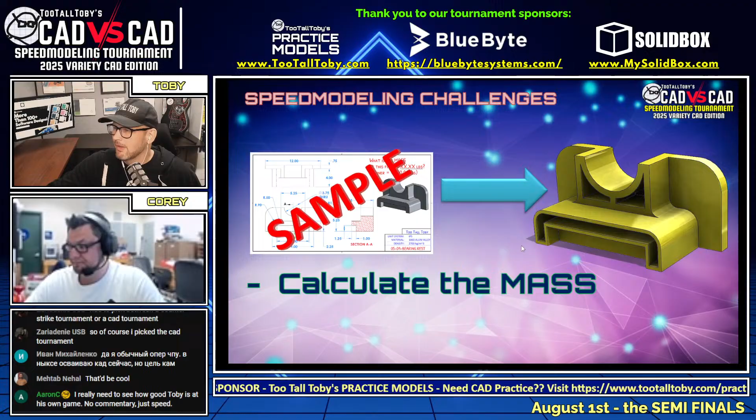Here's how these tournaments work. Imagine we have a match between Ivan the Reasonable and Aaron C. We're going to show them, and all of you, a 2D drawing, and we're going to challenge you to turn that 2D drawing into a 3D model. We're really challenging our runners to do this, but if you're watching, you can absolutely play along. Our runners will be challenged to calculate the mass, and then enter that mass directly into the YouTube chat.

Now, the tournament has some special rules. First of all, it's a best-of-3 matchup, so really a first to 2 points. You'll see our tournament runners in the upper corners have a little indicator of how many wins they have, and once one of our runners gets to 2 wins, they'll advance to the finals of this tournament.

To get a win, you have to earn the point. Let's say you answer and you answer incorrectly. Well, Corey and I are going to tell you, I'm sorry, that's incorrect, please try again, and then you have one chance to answer correctly again. If you get it wrong a second time, you can't earn the point for this battle. That doesn't mean the other person automatically gets the point, though - they still have to earn the point. The first person to earn 2 of those points is going to advance on to the finals.

Now, everybody who's watching can absolutely play along. Get your CAD system ready, get your screen capture tool ready, and when I show the 2D drawing, you can take a screen capture and try to model it and see if you get the answer correct first. If you do, there's a little thing we do in the chat - you could say 'I got it.' Or like Mesa Makes did, if you've got the membership to the channel, you get these special icons you can spam to let everybody know.

But what I don't want you to do is post the mass in the chat, and I don't want you to help our runners if they get stuck. Today, these guys are the stars, so we're going to let them shine. If you're watching and you realize somebody forgot to fillet or should do that as a shell, that's fine that you think that, but just don't type it in the chat. We want to make sure each runner has a fair opportunity to come to the correct answer.

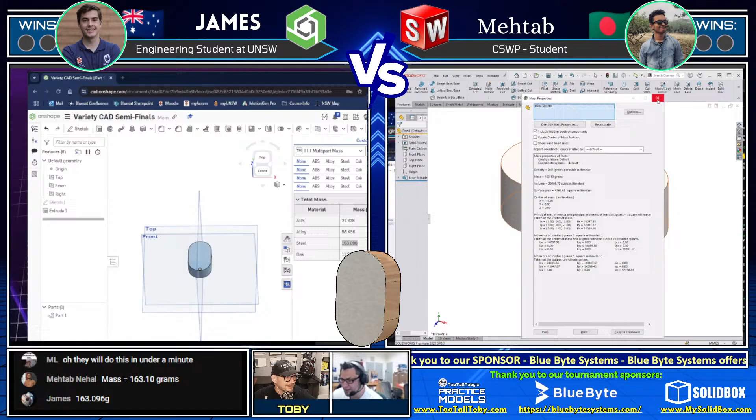Yeah, he's taking a page from Fancy's book, doing it with the trackpad. I'm going to do it, but I'm going to do it even harder. Trackpad on a Chromebook, he's just going for it.

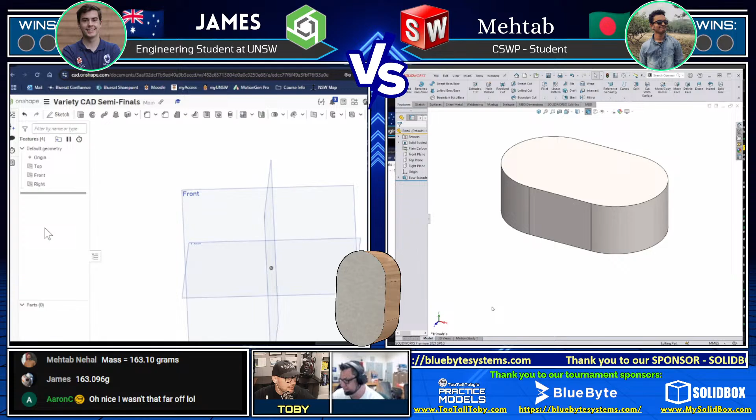I like it. We see here that James on the left is looking good, everything looks good on his screen as well. So I think we are pretty good, this is our tech check. This is where we make sure that everything is looking good and working before we actually get into the battles. We don't want to find out afterwards that we're missing half the screen or can't see the feature tree, something like that. So I think these look pretty good.

Corey, oh wait, we're missing something here, we don't have Corey's name. Oh, so stand up a little bit there.

I see Aaron C coming through with an answer too. I think he's using the calculator again because he was a little bit off. I like it when he might need to charge the batteries on the calculator. Yeah, maybe a slide rule and he slipped a little bit, I don't know what he was using today.

All right, we gotta add in Corey's name here. Hold on. Where's Corey's name?

Oh yeah, I was surprised for a second, I thought this was the real model. It says ML, it seemed too simple.

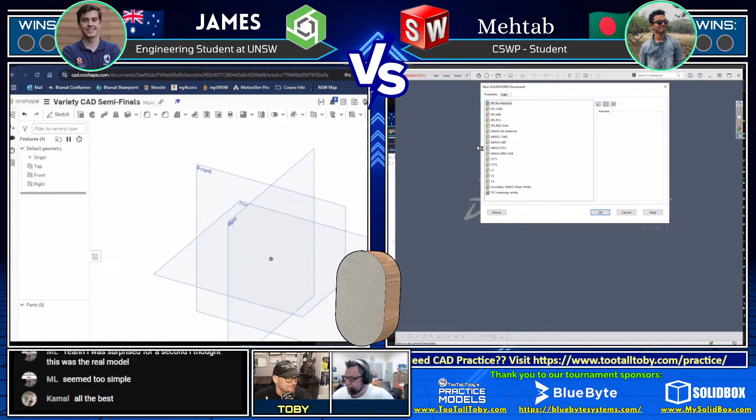Yeah, we always do a tech check to make sure. I know when we ran the high school tournament there were definitely some issues with units and material libraries, and this tech check definitely saved some kids from completely messing up their models later on when it actually mattered and counted. So we got to make sure we got everything right before we actually get going here. I think it was a couple years ago, who was it, was it Dom? His whole computer reset during the tech check or something, man, SolidWorks crashed. Yeah, we've definitely seen some issues.

All right, did both of our runners come in with an answer? Aaron C came in with an answer, good job Aaron C, let's see here. James came in with an answer, and Mehtab came in with an answer.

Okay, excellent. So it looks like everything is working correctly for the tech check. So that means the next place that we get to go is the Wheel of Fate.

So if you're here for the first time, what you should know is that the Wheel of Fate helps us determine which models are going to go to which runners by randomizing. It's proprietary technology only found here at Too Tall Toby's CAD vs. CAD Championship. So we're going to mix this up a little bit, shuffle up these names a little bit.

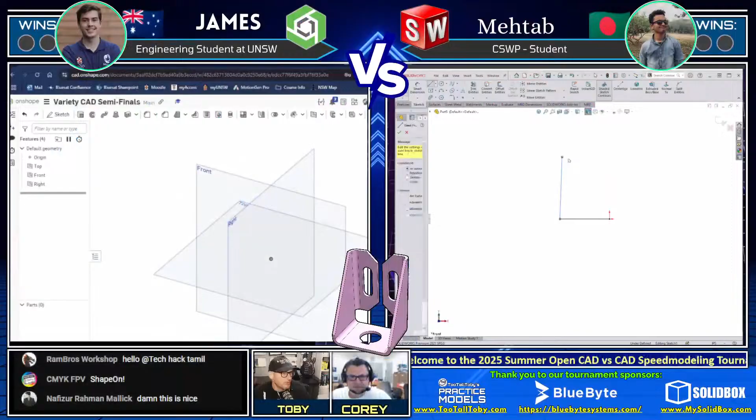Both of our runners have grabbed a screen capture of this challenge, and so we move into the CAD vs. CAD arena. We've got James on the left using Onshape. We've got Mehtab on the right using SolidWorks. And it looks like Mehtab has already jumped in here, modeling this thing, drawing up. First blood. Yeah, man, drawing first blood, extruding this out.

Looks like maybe James didn't get a chance to grab the screen capture. It looks like maybe he was struggling. I'm going to just flip back to the screen capture here and make sure that he can see it. I apologize that we're going to miss the action a little bit here, but I just want to make sure that James does, in fact, have a chance to grab the screen capture. There we go. He's moving through the model now. Here we go, that's what we needed. So you see Mehtab on the right was able to extrude that out, take first blood.

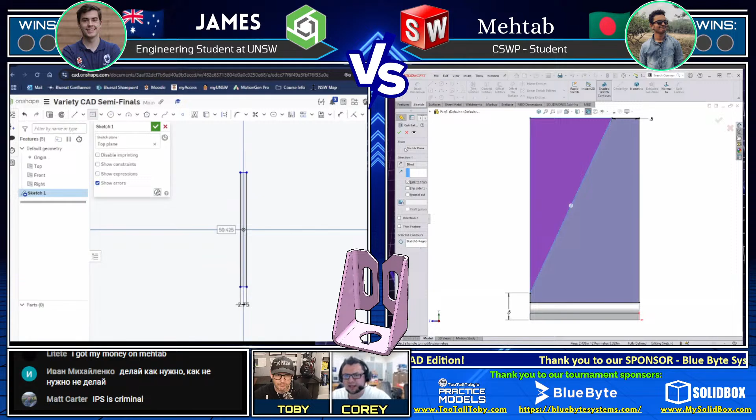Interesting approach here. He decided to just extrude that as an L shape with the sheet metal tools. I think that's probably a pretty solid approach. Yeah, no, for sure, it's an easier way to cut that like he's doing right here, you'll see. So yeah, I guess he's just deciding to do half of the model to begin with, and maybe he's going to use some kind of a mirror or something on the tail end.

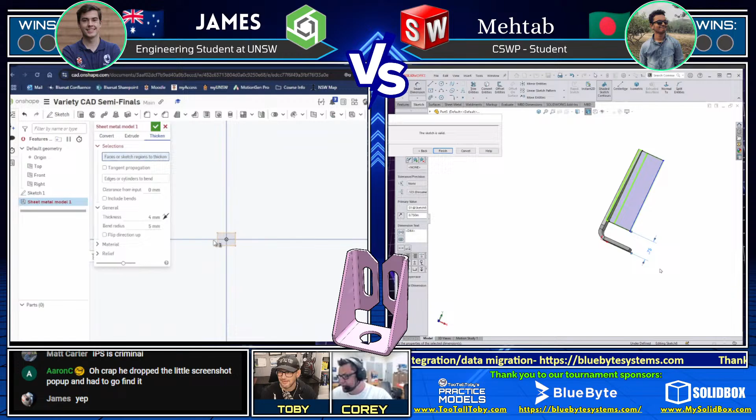What do you think about that approach? I think, I mean, I like seeing the whole thing laid out as that flat pattern, but however you get there, whatever works for you. I think when you're working solo in your own environment, you don't have to share, that's one thing you can kind of do however you want. But when you're in a collaboration, it's kind of whatever the team flow is. Yeah, exactly, you got to. That's a great point. It's not just about how you're modeling it yourself, it's really about how the whole team is modeling.

Cobain in the chat says, sheesh, Mehtab is super fast. Yeah, look at him, he's already gotten into his third feature here. He was able to extrude that L shape, he was able to cut that L shape kind of down from the top. And now he's getting in here and he's modeling up this little flange sticking out the back. And this model, I'd say, is a tier 4 model. It's a sheet metal model, which sometimes people struggle with. Not everybody has the most sheet metal experience, but it looks like Mehtab is having no problems with this sheet metal model. Getting in there, made those as fillets, realized those were supposed to be chamfers, no problem, just jumped in and edited them to get them to be chamfers.

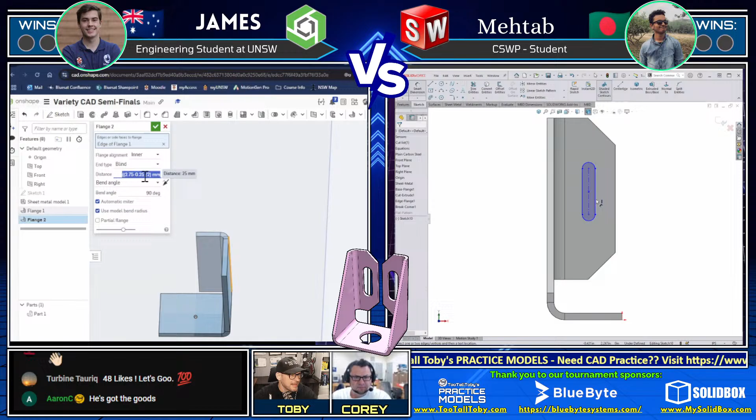Now we see Mehtab is going to go through and add in this slot here, this kind of slot shape running down from the top of the model, getting in there, applying the appropriate dimensions to locate it. It looks like James is getting those flanges thrown in. That mold line, inner, outer, those kind of always mess with my measurements sometimes too. Yeah, that's a great point, it's definitely something that I've learned a lot about. I kind of come from a sheet metal background, so learning where the flange is derived from.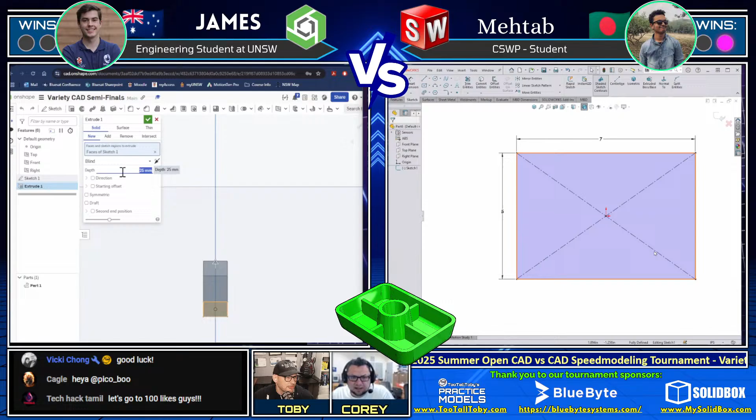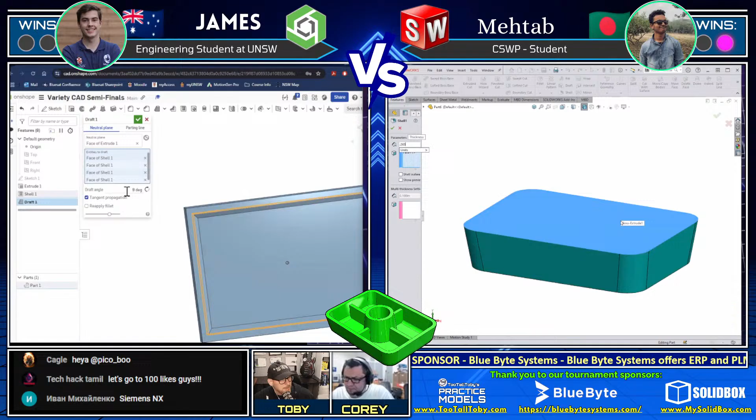Let's take a look at how our runners are modeling this. They both grabbed a screen capture and are going through. It looks like they're both starting in a similar location, looking down on this thing from the top plane and turning it into a boss extrusion. Mehtab, as he's creating the geometry, is actually adding the draft during the extrusion. James on the other hand decided to maybe create it as a solid and then he's shelling it out. I don't know if he added the draft... oh yeah, he did, I can see it tapered there on James's screen. So they both added the draft as they were creating that extrusion. I like that.

And they're both now attempting to get this thing into place. James going through adding some fillets there. Mehtab looks like he decided to add those fillets and then hollow the thing out.

I think that was a pretty solid approach there from Mehtab, getting those fillets on there and then hollowing that thing out. And now we get into the second phase of this design, the inner shapes. You've got that circular boss sticking up through the middle, which has draft. You've got the ribs sticking up through the middle.

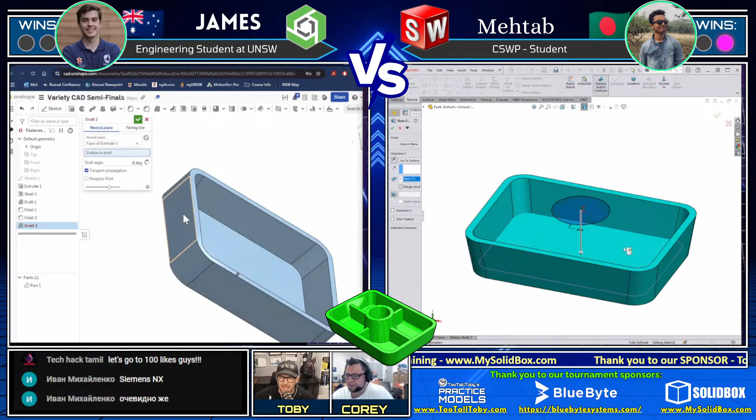And of course, when you're injection molding something, the draft will often go in two different directions along the same face, one for the inner face and one for the outer face, so that it can be ejected from an A-side, B-side cavity. So this is pretty interesting, this part here. It's not like you can just make a ring and then extrude it with the draft. You almost have to do it in two features.

Yeah, James is adding that draft now, and it looks like, when he was running with that fillet, it's definitely an order of operations thing I've run into before doing some of your practice models. If you add that shell after you've added the fillet, it'll automatically fillet that inside, which is a really cool workflow, especially if you're in these CAD competitions.

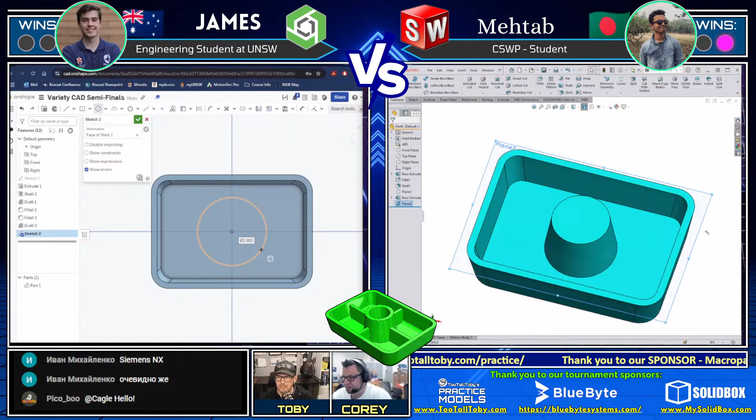Yeah, for sure. I think the challenge here is going to be the notation on the print. You may notice that there's a notation saying those fillets are not conical, that they are true radius fillets. So again, it comes down to order of operations. And sometimes, depending on the machinist, they'll prefer one versus the other. If they've got a tapered end mill that they can just rip around that corner on, they're going to want it to be conical, because that's going to make it easier for them to machine. But if they're doing multi-axis milling and they prefer for that to be constant radius, or maybe functionally it needs to be, you might receive a different note like what we see on this print.

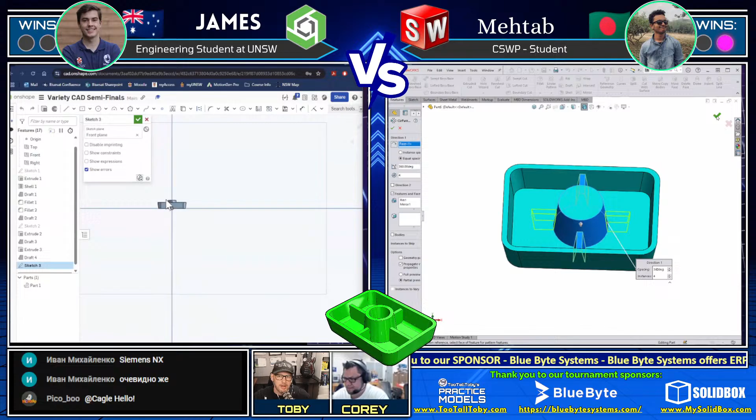Well, and then how many times you're gonna have to change a tool too? That's what makes a lot of people not like certain models or certain parts. So yeah, exactly. I think the lesson here is that if you're entering the world of manufacturing, you'll save yourself and your team a lot of money if you develop a good relationship with your machinists, a good relationship with your manufacturing team, and have these conversations to figure out what is considered standard. But here we can see Mehtab going through and trying to use the rib command.

Looks like maybe he ran into a little bit of a problem there. The first one went through no problem, but now, wow, look at that. He did a circular pattern and the rib extended on the circular pattern. Holy smokes, guys, that was a pro-level move. Wow, Mehtab, shout out to Mehtab, he really did nice there. That was cool, he did a circular pattern of the rib, and the pattern instance actually extended.

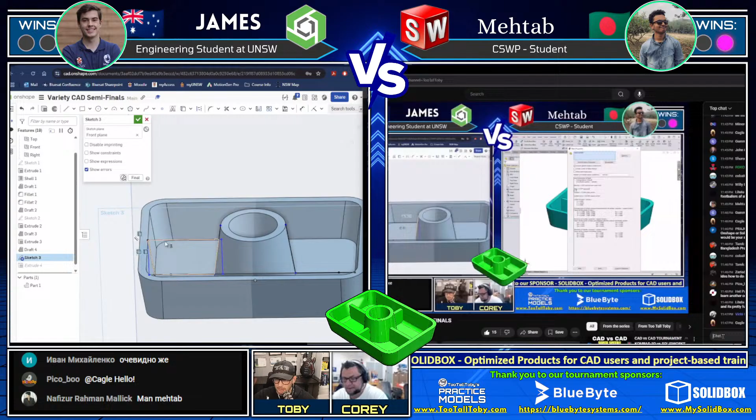Wow, and so Mehtab is looking over the model, and it looks like he may be coming in with an answer here. We're going to keep an eye on the chat and see what his answer is. And Mehtab coming into the chat with an answer, 0.777 pounds. And that is not correct. Unfortunately, Mehtab, that is not correct. He got the answer first, but it is not correct. So he's going to have to keep going through and trying to figure out what's missing. He's going to look at his drawing, he's going to look at his model, but that is not correct.

Shout out to Pico Boo in the chat, what is up my friend? And Vice, you want to remember that we're not going to be helping these guys out, okay? We want to try to keep this as friendly as possible. We want to let these guys figure it out. So let's make sure that we don't share any tips or tricks or anything. It's up to these runners to figure out what's going on in this competition.

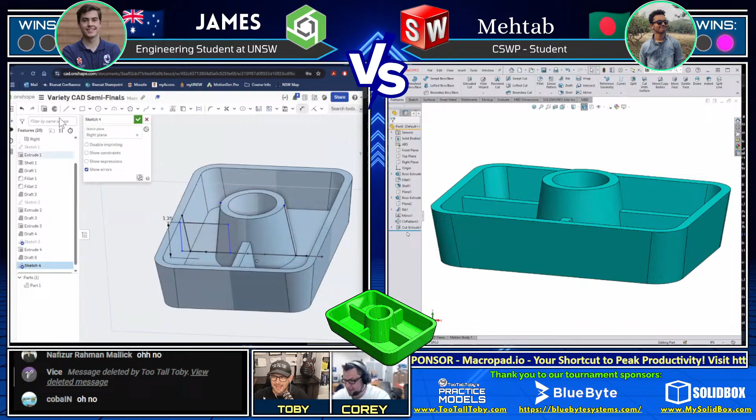Absolutely, and look at James using intersection. I just made a video on intersection the other day, and he's just right away embracing it. Yeah, intersection's a fun one, and you've got to have the right part to make it work. But once it works, you're like, oh my God, why haven't I used this for everything?

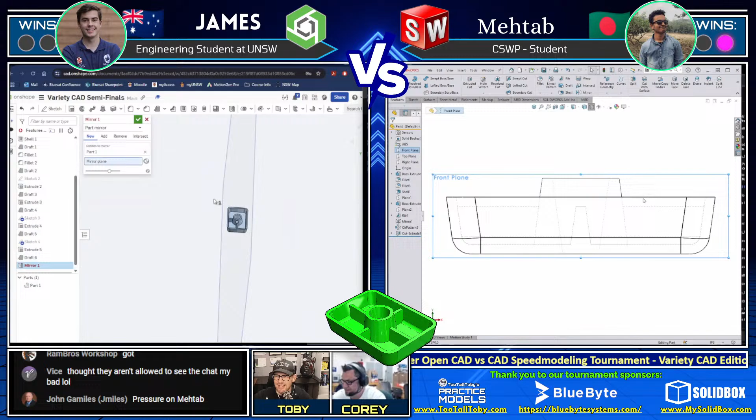All right guys, we're keeping an eye on Mehtab. It looks like what Mehtab's strategy here is he's really kind of checking and double checking and making sure that he's not missing anything. He doesn't want to overlook anything obvious that might end up costing him.

And James coming into the chat, 0.781 pounds. That is not correct, that is not correct. So both of our runners have answered one time, so both of our runners get to go through and try to answer again.

And Mehtab coming into the chat, 0.754 pounds. And Corey, we got ourselves a finalist. That is correct, 0.754 pounds, plus or minus 0.002 pounds.

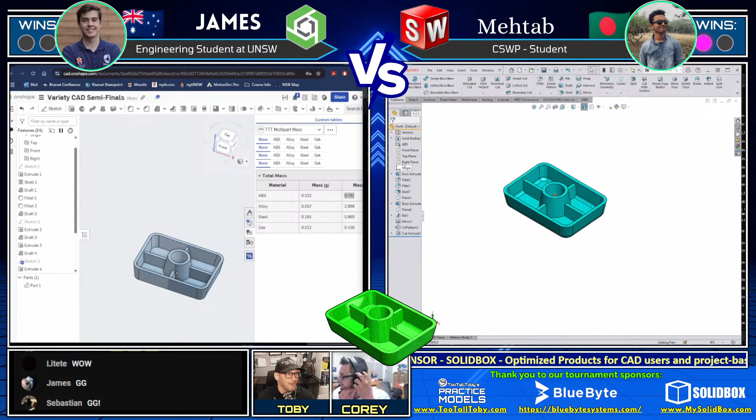Wow, wow, wow, GG to Mehtab. Congratulations, super fast once again on both of those models. A little bit more complicated than the models from last week, but wow, wow, wow. Good game to Mehtab, good game to both of our runners in that battle. But my goodness, Mehtab absolutely crushing, ran into a couple of hiccups there, went back through, figured out what the problem was.

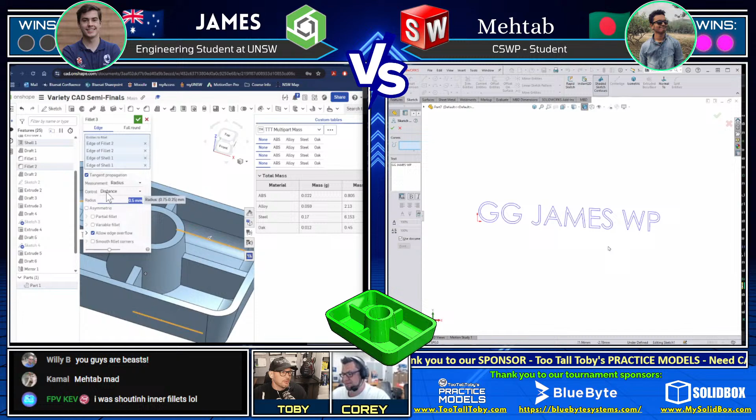It looked like in that one he was missing that fillet on the bottom of the model. He just needed to go through and add in that fillet, and he was able to figure out how to do it without blowing up the tree. And true professional grade work there. Wow, wow, wow, absolutely, congratulations. Well done, my friend. Guys, let's give a GG to the winner in the chat.

Let's give a GG really to both of our runners. Congratulations to James, his very first tournament, and he's made it into either third or fourth. We are going to ask our third and fourth place finishers to come back next week and do one sudden death battle to determine who is in third, who is in fourth, kind of warm us up before the finals. So we will see James again next week. But congratulations, your very first CAD vs CAD tournament, made it to the semifinals.

Well done, my friend. Yeah, well, and you did better than me, so we made it look good for Onshape, and you at least had a chance going. I felt like I was left in the dust of Gray's work last week. So yeah, good job, exactly, James. And going up against the number one seed, man. And for sure, finishing those models is super impressive.

We can see, I'm just going to click back to the CAD vs CAD screen for a second. You can see here that James was able to get that model to the end, get it to completion. And so just finishing those models in that limited amount of time is super impressive from anybody.

So GG. And I think the other thing to look at too is I always look at feature trees, and I see students make stuff, and if they're having a lot of unnecessary things - like his was fairly straightforward and pro level. So there's a couple of ways he could have cleaned things up, but I mean, I'd hire that guy tomorrow. Like that's great, and that's what we're here for, right? It's all about educating the workforce and going from there. So I think he's doing a great job, and I'm going to reach out to him. I want to see him talk to the kids because I think he knows the stuff, and it can show what can be done with Onshape, right?

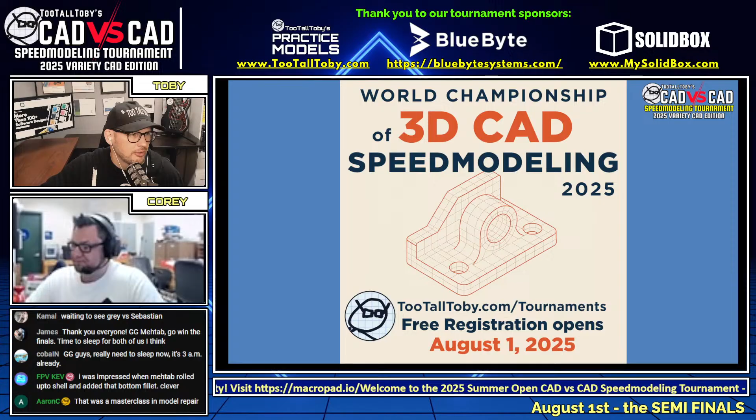And so if you really want to learn how to do this, you're going to need to practice.

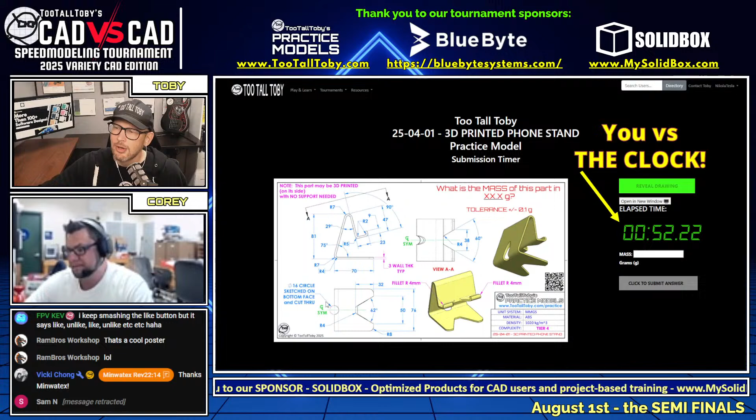If you want to get better at that, if you want to increase your speed, visit us at tootalltoby.com. Over 200 2D to 3D CAD challenges. When you're doing these challenges, just like in the tournament, it's you versus the clock. So you can time yourself, use the try again feature, time yourself again, and get faster and faster. You can keep practicing, keep learning these skills.

You'll see there's a library of community speed runs and tutorials. The tutorials help you understand the step-by-step of how to model the part. But the speed runs is where you can really mine for gold, because you'll realize, oh, I didn't know you could do fillets by putting a window around the corner, I got to start doing that. Or I didn't know you could dimension by just drawing a line and using auto dimension on the line. That's way faster than going back in and adding dimensions afterwards.

What do you think is one of the coolest shortcuts you've learned from watching these speed runs, Corey?

Somebody commented on one of my videos, and I was reluctant to post to qualify for this tournament. I thought maybe I'd wait till the end, because if somebody sees my shortcut for that sheet metal flat view and extruding everything at the same time... Then somebody said, dude, you could do it faster on your corners if you did a corner break. I'd never done that before, so I tried it, and I figured out a way I could select everything and it would add fillets, selecting a million faces but only adding it to the ones that actually mattered. I was like, oh, this is really cool, and I think I shaved off like 30 seconds. So there were definitely times I thought, do I post it today or do I wait, maybe get feedback and somebody will tell me I'm doing it wrong and show me how to do it better.

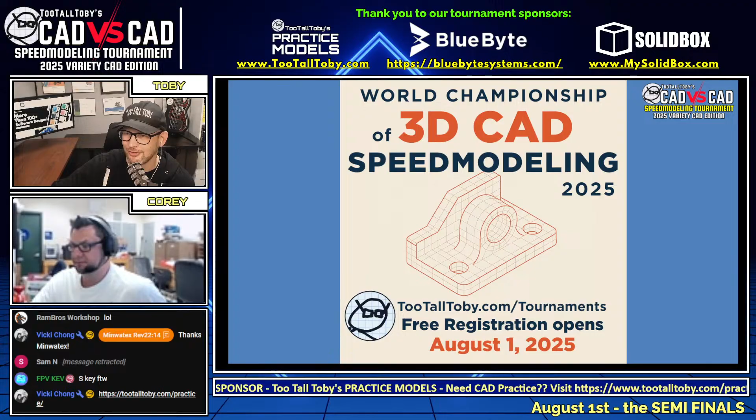I saw earlier in the chat somebody said NX. NX is going to win the whole thing. NX is the best, and that is awesome. We would love to see some NX users in here, some Unigraphics users in here. We see Siemens NX, yeah, it was posted a little bit earlier. Siemens NX is going to win the whole thing. So I would love to see some NX users in here in the World Championship. The World Championship is open to all 3D CAD users regardless of the system.

Good, you ready for the World Championship, Corey? Oh yeah, I was looking at those drawings this morning and I think there's some good ones. There's definitely, I know we were talking about real world projects, and one of those is definitely, oh yeah, I swear, I think I have those plans. We've made that for years in our ag mechanics classes, so we might build one up and send one to you. I'll have the kids make it for you.

And Aaron C in the chat, listen to this: I am by far the fastest modeler at my company, completely thanks to TTT. I can come up with a full CAD design almost as fast as I can sketch it by hand now. It's awesome in the brainstorming phase.

Yeah, exactly, that's what we really want. We want you guys to understand that this is all about helping you use a tool better. I remember somebody on Reddit or one of the message boards said CAD's just a tool, it doesn't matter, you don't have to be fast in it, it's just a tool, it's not really what engineering's all about. And my response to him was, a speed square is just a tool. Does that mean a carpenter shouldn't learn how to use a speed square?

If you've ever really looked at how a speed square works, all the secret hidden functionality, I have a book this thick on everything you can use it for. Once a carpenter truly learns how to master that speed square, they're going to be able to finish jobs faster, quote jobs faster, come up with workarounds faster. It's really the same thing here. Yes, CAD is just a tool you use in engineering, but if you can learn how to master that tool and brainstorm faster, you're going to be able to really enjoy the engineering part of it even more.

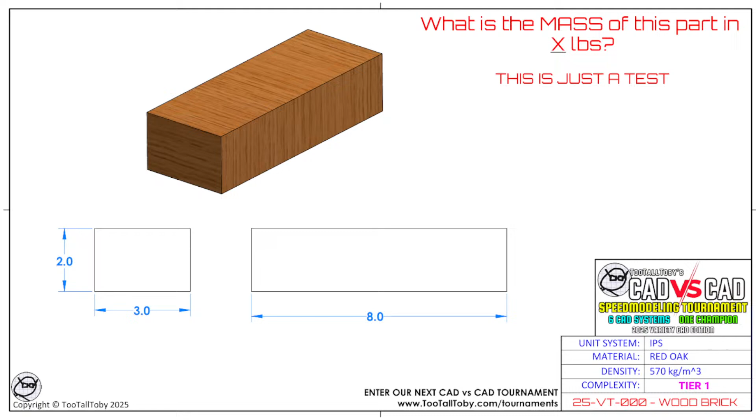What is the mass of this part in X pounds? Right now our runners, Sebastian and Grey, are going to try to get this model up and running on their screen. We're just going to make sure all of our CAD systems are working, everything is set up correctly, and that we can see everybody's screen without running into any technical hiccups. Just a quick tech check.

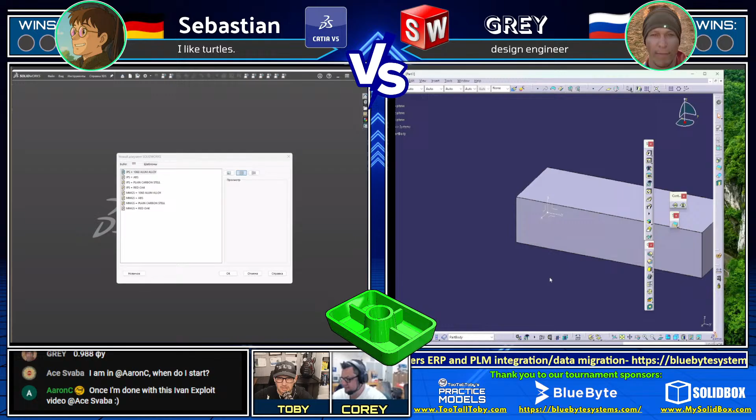Easy model, wow, they finished it too quick. They were flying, got it going pretty good. I was watching on our call, everything looks good. Yeah, we're good. I love seeing Grey's SolidWorks layout, he uses this really cool blue background. I know I say it every week, but I just love seeing his setup. And of course Sebastian has been absolutely crushing it on the speed modeling leaderboards.

He's our CATIA user. He's introduced me to the super friendly folks on the CATIA Reddit board, so that's been a lot of fun hanging out over there. Shout out to anybody watching the tournament from the CATIA Reddit board, great to see you in here, and appreciate all the dialogue we've been having over there.

We see in the chat, Aaron C says he's going to start his own CAD company, and he's going to have Victor K and Ate as his first employees, and Ricardo and Rambros. I feel like if we started a company, we'd cost way too much because there's always the time versus money thing, you get what you pay for. We'd have some awesome models if we started just from this community alone.

And if you guys want, we'll be the ones, we'll fab everything with my high school students. Oh, I like that, I like that. It's learning, so it's not child labor, we're good there.

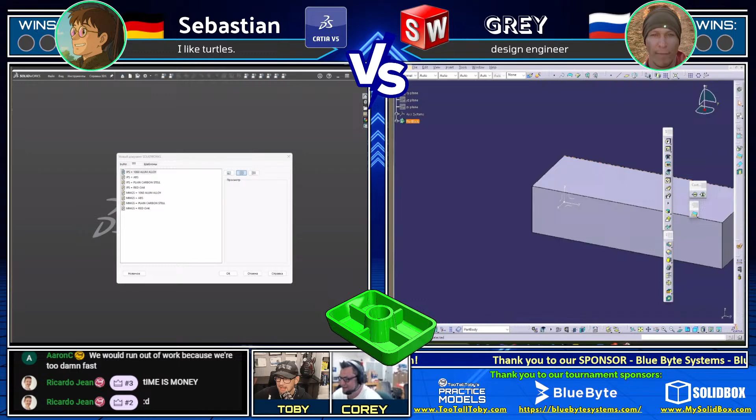Sebastian comes in with an answer, 0.988. Grey comes in with an answer, 0.988. That is correct, well done. Well done, all right guys.

That's it for the tech check. Let's get into the Wheel of Fate, see what the Wheel of Fate has in store for us.

Screens are wrong, by the way, screens are wrong. Let's see, thank you, yes indeed, that is correct, thank you. So Grey is over here, there we go. Who said that? Shout out to that. I don't know, oh, Ate said it at one point. Thank you, Ate, great to see you in here, my friend.

Thank you, thank you, thank you. That's kind of what it's like when you're an ag teacher, right? You don't make a lot of projects, then some kids start making it and get hungry, they're like, we can do that, let's make more. Pretty soon you have nowhere to walk in the shop because everybody's making projects. It's a good problem to have. Deathview caught that as well, thank you Deathview, thank you, we got to make sure we get this right.

Here we go guys, let's see who or what is in store for these runners. I got a feeling this is going to be a good one. We're about to see a good one here, Corey. Yeah.

Okay, model number 16, okay that'll do. Oh, your Wheel of Fate's not up I don't think. Wheel of Fate is not up. Okay, thank you, here we go. Model number 16, that will do. We gave it a spin. Model number 16, that will do.

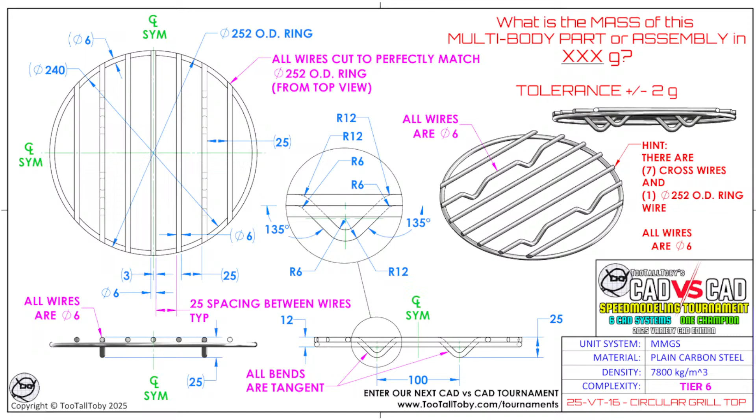Both of our runners are deciding how to approach this thing, and it looks like Grey has already gotten in there and drawn a circle on the top of the model, while Sebastian may be thinking about his approach, but Grey is wasting no time. He's created his circle on the outside using a construction line, and now he's creating a revolve using that inner circle, or possibly a sweep—I guess he did it as a sweep using that inner circle. That was very smart to get that OD correct. I knew that was going to be a little bit tricky, and wow.

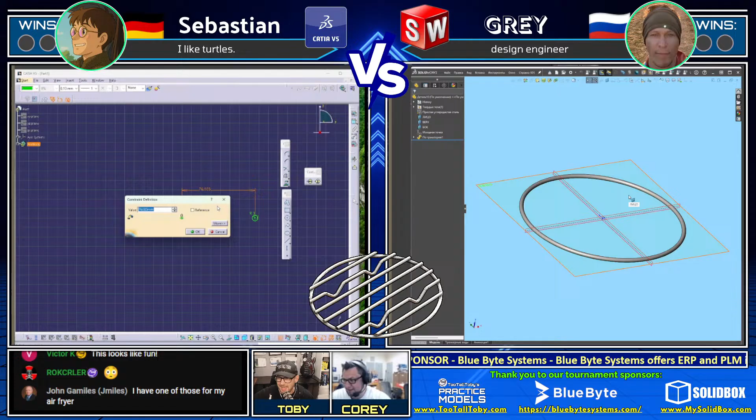Jay Miles in the chat says, I have one of these for my air fryer. Right? I was thinking barbecue grill. I know I'm going to have a student that's going to want to make this year too, so we'll see.

Yeah, this is a fun model, our first tier 6 model of the tournament, and wow, you can imagine that this thing is going to have to be approached in phases. I think the first phase is to create that outer ring, and it looks like both of our runners agree, and both have created that outer ring. Now Grey, moving on to the second phase of this model, he's trying to figure out what's going to be the best spacing on this thing.

One of the things that often happens in manufacturing is you receive a drawing like this, and it has the spacing between the wires, not the center to center, but the spacing between, and that makes things a little bit complicated if you're not paying attention.

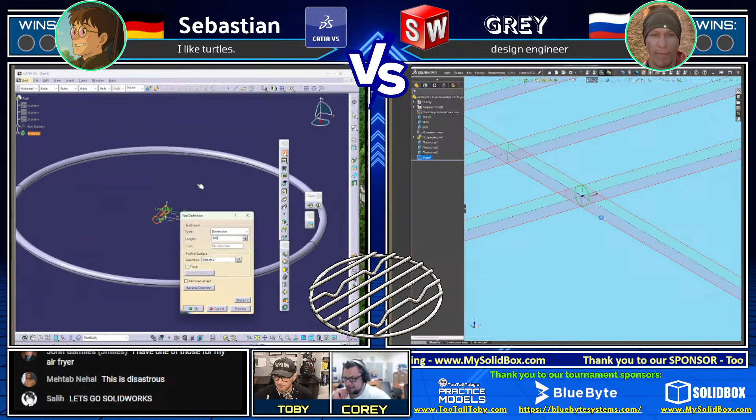That's definitely one of the things we run into in fab with the kids. I ask how'd you measure it, and they say it was 25. I say well, you got to have the thickness of the tube. Did you go center to center? Inside to inside, outside to outside? Diagonals? Like how TVs are measured, it's kind of crazy. Very important, right? If you use the wrong one, it's not going to fit. We can all measure the same thing 5 different ways and all be right.

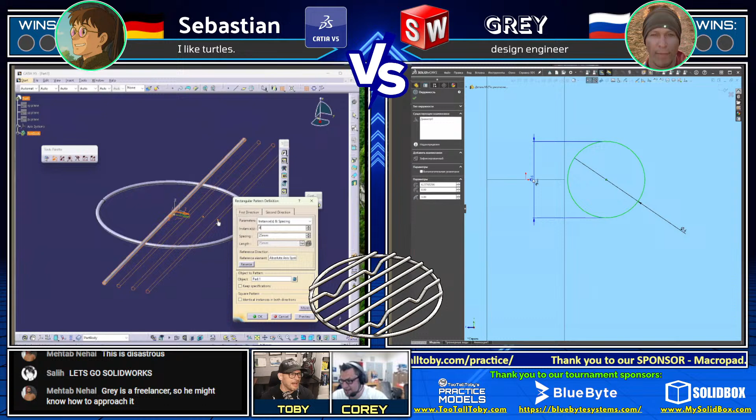So we see Grey here modeling this thing up and creating it using SolidWorks sketching there, creating that sketch on the side. Meanwhile Sebastian on the left is using CATIA, moving into that second phase, creating those crossbars. Looks like he was able to get those crossbars in place first, but now it looks like he's struggling a little bit to get them located.

Very interesting here. I thought it was really interesting how Grey decided just to rip through there with those planes to begin with. We're going to see if that ends up paying off. Yeah, I think it looks like Sebastian did a pattern of some sorts, like a skip instance or something. Maybe modeled one and did a pattern. That's an interesting approach as well, and I could definitely see how that could be beneficial.

You notice it looks like both of them are kind of making that original cross wire oversized. So I wonder if they're thinking about taking kind of a manufacturing approach to get rid of the extra.

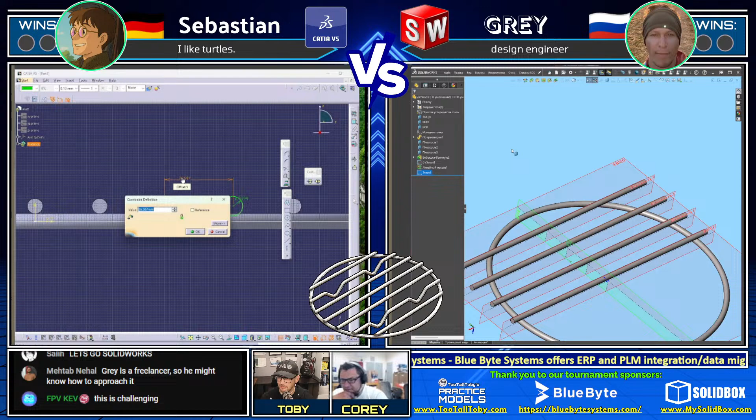Yeah, it's definitely different because I teach welding, so every other part you have, typically these bars, you're talking about cast parts. This one is a bunch of bars that are going to be really crappily spot welded. But they're all in that tangent relationship, they have to sit on top like they're doing. So it's a really cool, but really challenging model.

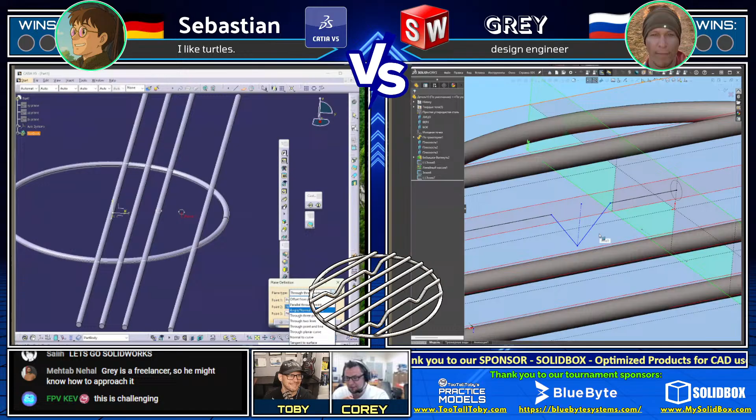So I know Mehtab earlier in the chat was saying this is disastrous, and I think he's glad that the wheel didn't pick this one for him. So yeah, it was interesting. Quite the ramp up from the tier 4 models that we were seeing in the first couple of battles, and that's how the wheel can be.

So now we see Grey kind of moving on to, actually both of our runners, both Grey and Sebastian, moving on to this third phase of the challenge, which is how do you get those little feet that are sticking down? There's 4 of those little feet sticking down on this grill to kind of elevate it. So how do you get those feet in place?

Do you cut away the extra geometry? It looks like Grey on the right has decided to sketch the whole thing starting from the middle and working out. How do you get those fillets in place? How do you get the geometry to all be locked down?

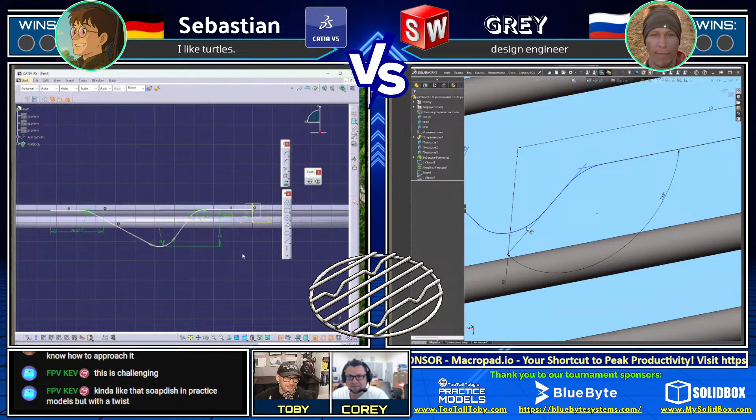This is all very important when it comes to calculating the correct mass, and really, really interesting challenge here. Definitely a challenge that you would break up into multiple phases, thinking phase 1, phase 2, phase 3, and I feel like they're kind of on that. They're both on that third phase now, figuring out how to get those feet in place.

Yeah, for me personally, outside of a speed modeling challenge, I think I would do this like Part Studio 1 would be the simple bar, the crossbar, and then do some variations, and then I'd apply everything in an assembly to figure out how I'd want things, but I would draw it all separate. But obviously it doesn't work as fast in the speed modeling world.

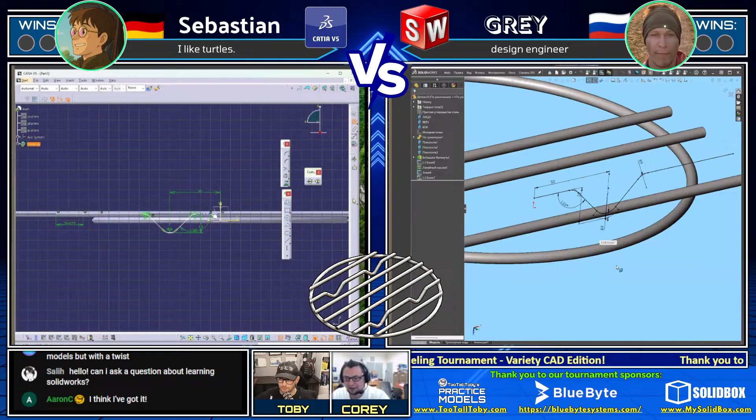So this is really neck and neck here. We see that Grey on the right has gotten that solid geometry in place for that shape, but Sebastian is right behind him, hot on his heels. This might come down to whether or not somebody makes a mistake and opens the door for the other runner.

Look at Sebastian on the left there, has that foot in place, but we see Grey has gone through and used a cut there to kind of clean up those wires on top. That's kind of what we were thinking was going to end up happening. Look at Sebastian though on the left, he's got all the things.

We're going to see this answer coming in here pretty soon. We want to make sure that we are watching the chat. This is neck and neck here, guys. Sebastian really came up quick.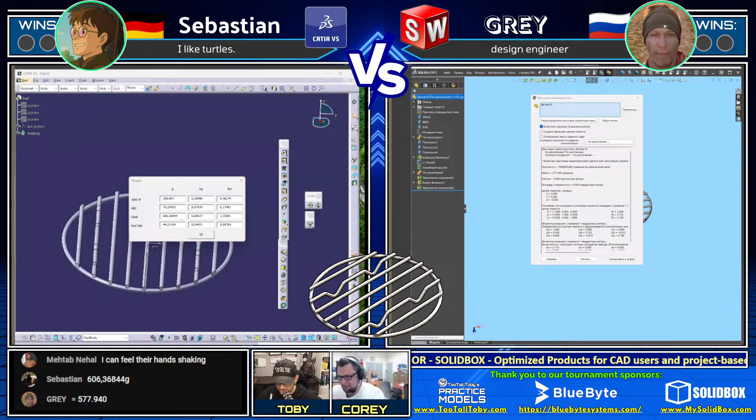606 from Sebastian, that is not correct. And we got Grey coming in with an answer, 577 or 578, that is not correct. Wow, two answers came in really, really close, and now things get interesting.

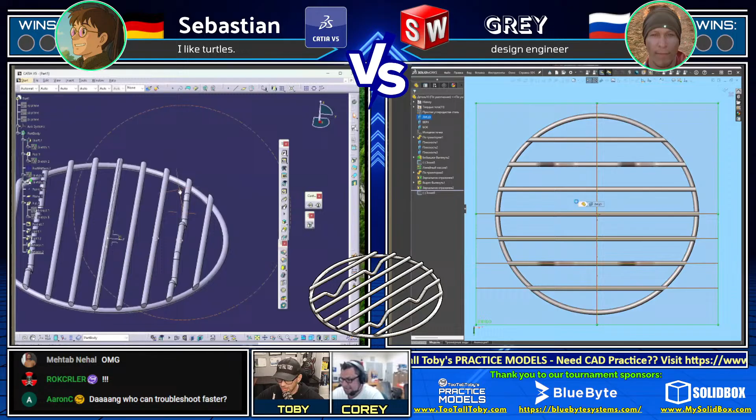Both of our runners need to look at their work and examine where things maybe went wrong. They need to examine some of their dimensioning. Now it comes down to who can troubleshoot faster. Both of those runners really came in quickly with those initial answers, very close to one another.

Aaron C. says, this is where the good is separated from the great. We now need to go through and troubleshoot our model and try to figure out what dimension is incorrect. You can see there that Grey is using some on-screen dimensions to try to figure out what's going on.

But I got to give a shout out to both of these runners. I cannot believe how fast they were both able to get their initial answer and just get that geometry constructed. That is fantastic. If you were just doing conceptual brainstorming with a customer, that's super fast to get that geometry constructed.

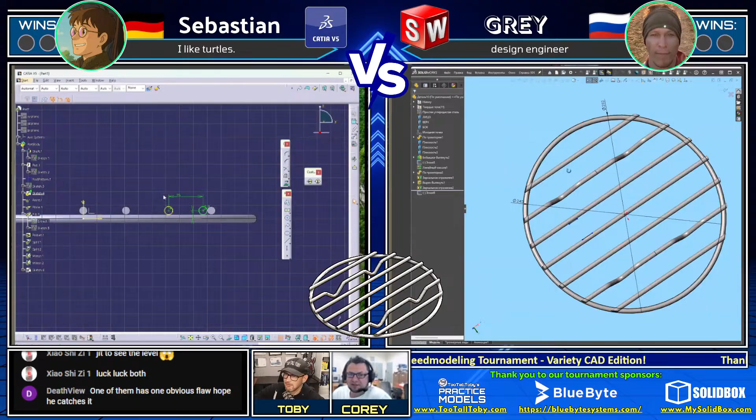Both of our runners coming in with fairly close answers, 606 and 577, but neither of them is correct. Deathview saying there may be something that one of them can see.

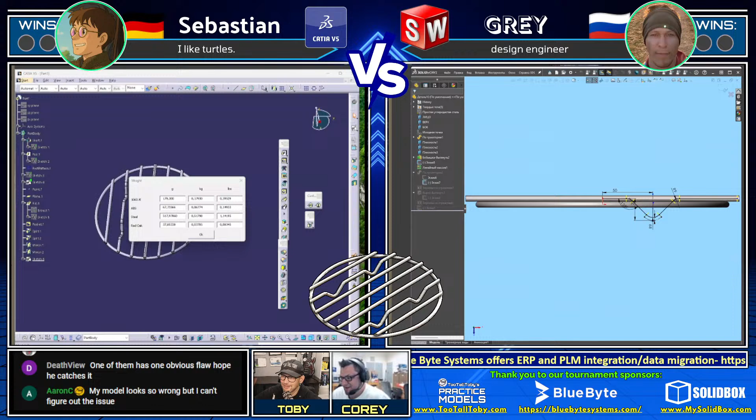Interesting guys, I think we're coming in with another answer. This is where it gets a little bit scary, because if you answer and it's incorrect, that's gonna be it. You're not gonna be able to revise any further. But you also know that it could be any moment.

It's almost like a game of chicken, where if your opponent decides to just let it rip and answer, then they're gonna be the ones who end up getting it. But then you get your Clock of Doom time, and I don't know if that's any better. It's one of those stress tests. Yeah, this is definitely one of my favorite elements of the tournament, seeing how these runners react.

And Sebastian comes in with an answer, 518 grams, and that is correct. There we go. Sebastian and Grey, oh my gosh, this was an awesome battle. Wow, wow, wow, one point to Sebastian.

You got to earn two points to move on to our finals, but Sebastian gets it right, 518 grams plus or minus 2 grams. Wow, wow, wow, what a close match there from both of our runners.

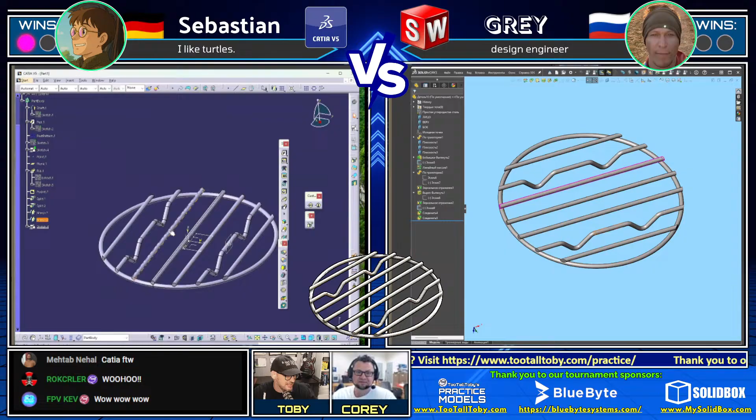Yes Corey, what do you think about that? I was speechless, man. That was like just watching that workflow and seeing how things worked. And man, they were fractions of a second behind each other, and close. It was just amazing, oh my goodness.

Yeah, GG to both of our runners. GG to Sebastian earning that point. We saw Grey pull ahead real quickly there in the beginning, and I thought it was over.

I was counting Sebastian out, but then when those two answers came in at the same time, oh my goodness. Wow, yeah. Okay guys, well I got to tell you, that was absolutely thrilling, and I cannot wait to see what happens next.

In the chat, we see Mehtab saying sweeps are hard to speed model. Sebastian saying my brain froze when I first saw it, not going to lie. No, you were taking it all in, you were planning your attack, and that's what it was, that's what you got to roll with.

That's what I mean, when you get a model like that, you got to right away start thinking, like, what are the phases going to be? So FPV Kev thinks it's going to be 19, ROKCRLER 17, Xiao 20, Vicky Chong 19. Wow, wow, wow, this is some tricky stuff here.

Good luck, guys, you got to win 2 points to move on. This is far from over, and everyone is hoping for the same thing. We're all hoping that we end up seeing 3 battles.

Sahil in the chat, Salil in the chat, saying what is the wheel? The wheel is how we randomize the challenges for our runners.

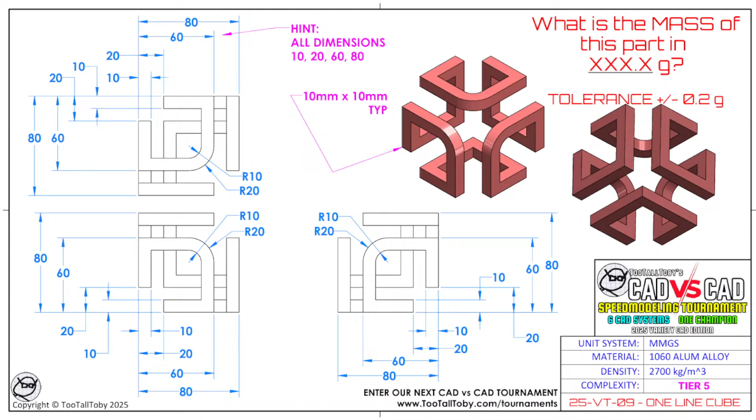Here we go, guys. CAD versus CAD battle. Our number 3 and our number 2 seed. It's an awesome model. It looks so easy.

But if you try to model this, this is exactly how I thought it was going to run too. When I saw this today, I was like, yeah, they're going to sit and think for a bit because you have to, right? There's definitely some things, I think, the way I would approach it, but we'll see how these guys handle it today. This is one where there's a lot of ways you could approach this, but a lot of them are going to end up with a lot of complex geometry.

This is not going to be easy, that's for sure. I think this one throws away a lot of our tricks too. There's some things that we've definitely perfected in the community, like oh, I could do it this way, or if I see this, I'll try that. This kind of throws those away, right? This one puts everything on its head. Good luck with an Ivan exploit on this one. Yeah, if you can come up with it, go for it.

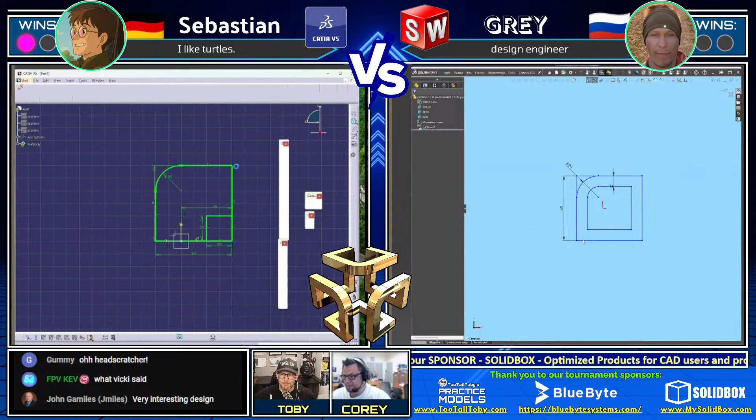But yeah, this one is going to be very interesting. It's very much like a corporate logo. I'm sure there's companies out there who have used this. But it's essentially just a cube, but a cube with some very interesting geometry in the middle.

All right, we see Sebastian drawing first blood, creating that first shape there on the left. Now the question is, what is he going to do with that first shape? How is he going to utilize that shape? And is he going to build out from there?

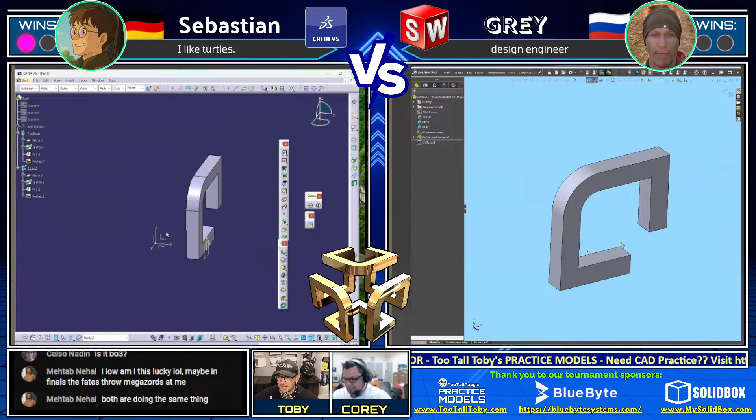And Grey on the right, taking the exact same approach, ending up creating that extrusion there, the exact same extrusion. Now, the question is, what are they going to do with this, and who's going to be able to do it faster? So we see Sebastian on the left, what's he going to end up doing? Grey on the right looks like he's opted to jump into a second sketch, and he's going to try and use that second sketch to figure out what this next section of the geometry is going to look like.

There we go. Yeah, the kids have called this an infinity table, and they've wanted to make one for a couple of years. And I'm like, unless you can prove to me you can draw it and cut everything, like we're not doing it. Because even when you go to put it together, you weld something in the wrong direction and you have a whole different project. So yeah, exactly.

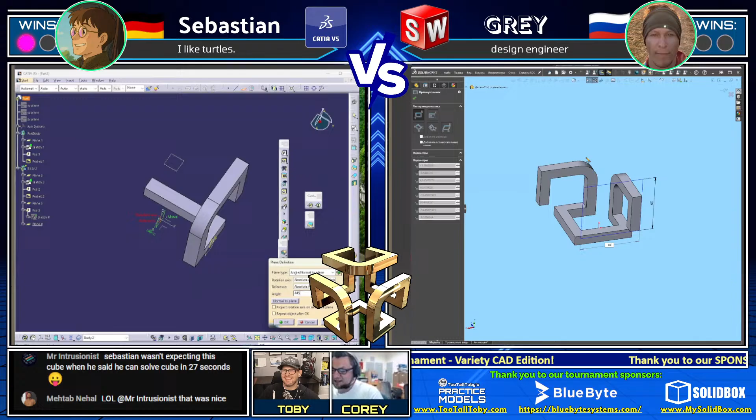Very interesting, I love seeing what Grey is doing here. Wow, that was a really, really interesting transition there from having that initial shape to having the shape he's got now. That was clutch. Mr. Intrusionist in the chat said Sebastian wasn't expecting this cube when he said he can solve a cube in 27 seconds. So true, definitely a different kind of cube there. Absolutely. Oh, and Sebastian looked like he backtracked and then kind of followed right in step, very interesting as well.

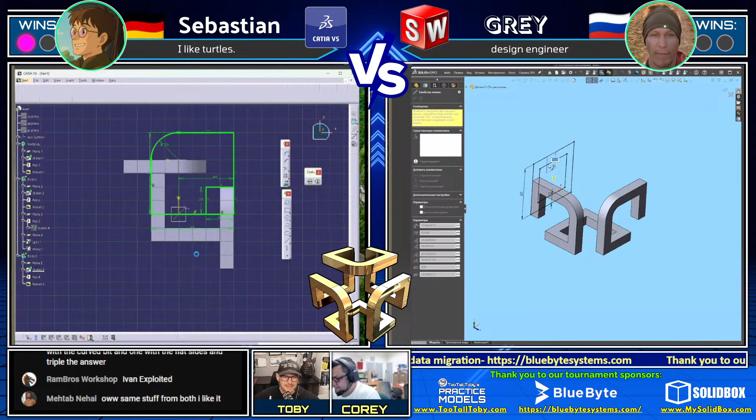It looks like they're kind of winding down here. Wow, that was really fast too, how Grey was able to get that shape in place. Now, what is he going to end up doing with that shape? He's going to use the same kind of layout that he had initially created, it looks like, to set himself up with this next region here. Wow, now there's one thing, and I know you're thinking about it too, and we're not going to say it, but there's definitely a crucial moment that I'm looking for.

I think just rotating your view around too just starts to get you a little seasick. Disoriented. What side am I looking at?

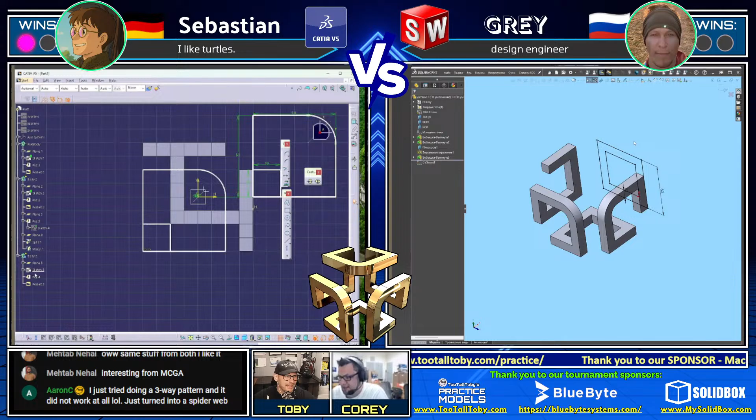Yeah, I definitely made this thing a few different ways while I was auditing it, and I don't have any idea which one was best or fastest. I did everything from 3D sketching to crazy shelling type stuff to Boolean type stuff. I did it all as I was auditing this, and I don't have any idea which way is the best.

Lots of cuts. Start with a cube and just cut away. Yeah, exactly. That would be insane.

Grey is really turning up the heat here on this one, making some really impressive progress. And it looks like he may even be coming down the home stretch. Let's see what he can do about this final section of the model that he's working on here.

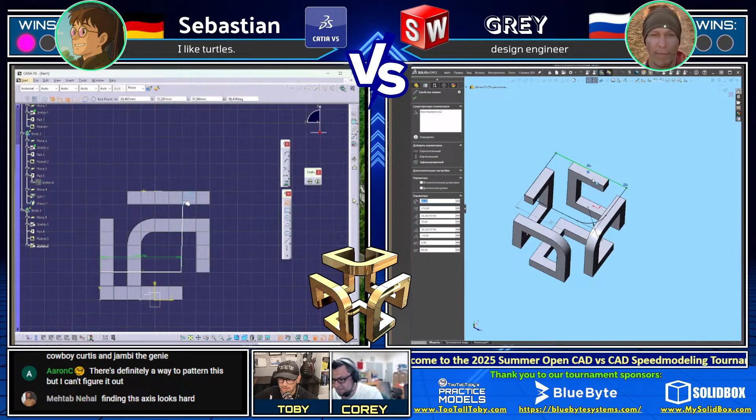Looks like maybe he got some inadvertent relationships that he's trying to get rid of. I think we've all been there with an inadvertent relationship we need to get rid of. Yeah, if you know what I mean. Life lessons from Toby, right?

All right guys, we're going to keep an eye on the chat. I got a feeling we might be seeing an answer coming in here.

Wow, Grey really made some great progress there for sure. And we're going to keep an eye on the chat. And Grey coming in with an answer.

205.4 grams, and that is correct. And we are going to a third match, guys. And Sebastian coming in with an answer, 205.4 grams. Guys, the correct answer is 205.4 grams.

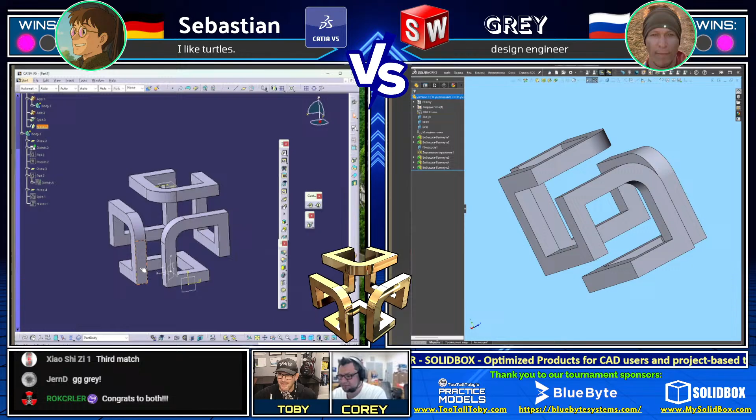What a couple of wizards we are seeing here in today's match. Wow, wow, wow. Great job to both of our runners. Total head scratcher on that model. That is not easy geometry to construct, and they both did it not only in speedy times, but very close to the same amount of time.

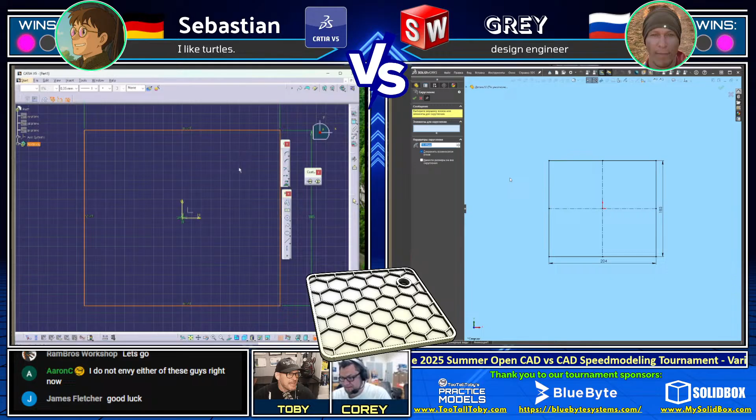Both of our runners are grabbing a screen capture, both jumping into their CAD. We got Grey on the right using SolidWorks, sketching a rectangle looking down from the top. We got Sebastian on the left using CATIA, also sketching a rectangle from the top. Grey is going to extrude, drawing first blood here, just looking for the measurement. Sebastian is looking to include that circle in the first sketch.

Interesting approach. Mehtab in the chat saying, wait, wasn't this part in Discord? Yes, there was a discussion in Discord about how to create a hex pattern. I see Jern in the chat, regular in Discord, recognizing the hex pattern discussion.

Guys, who is going to get this thing modeled up first? You will probably at some point in your CAD career be asked a question about how to drop a hex pattern onto a model, and it's not easy, that's for sure.

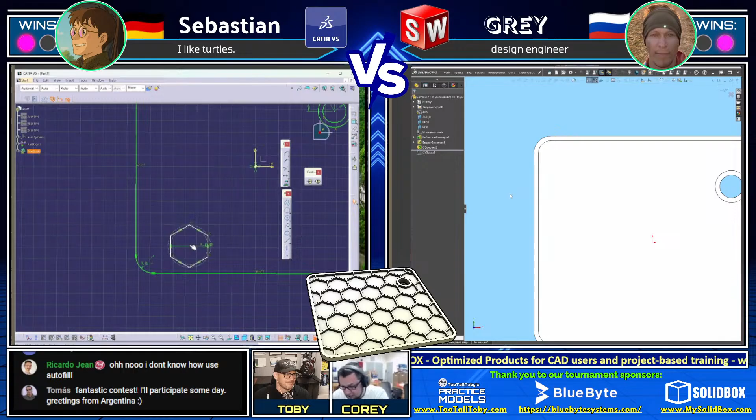We did it when I was in high school, actually. I tried doing it the old-fashioned way, copy and paste in hexagons, because there wasn't really a pattern tool and it was 2D CAD. We were trying to make a skateboard out of metal, and that was going to be your grip, so you wouldn't have any grip tape on it. All the hexes would fall out, and that's how you would skate on it. Then I thought, well, if I fall and my ankle gets hit by a piece of metal, we probably shouldn't do this. So we scrapped the project and didn't move on any further.

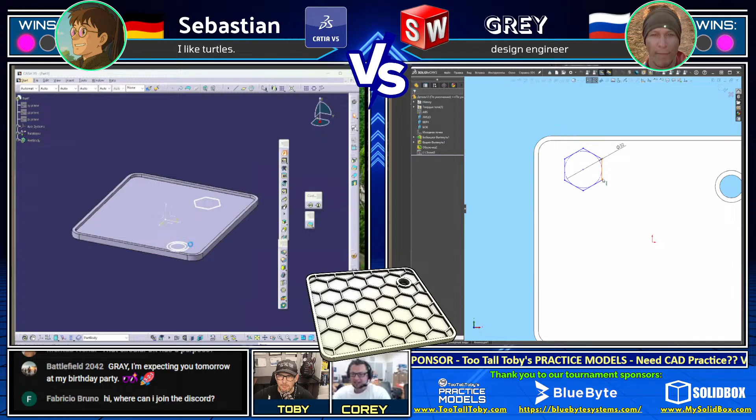Well, this is absolutely fantastic. Wow, wow, wow. Mehtab says that circular bit has a purpose, maybe just for hanging it. If this is a kitchen hot pad, then that might be for hanging on a hook or whatever. Yep. Fabricio asking where you can join the Discord.

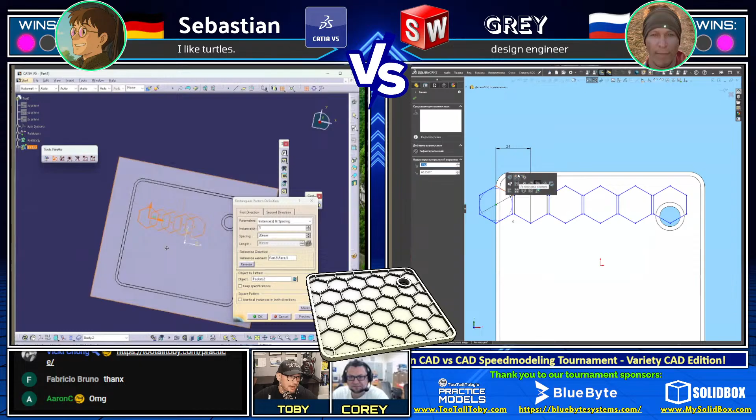Gray, I know both Gray and Sebastian are English as a second language, so just make sure that they know to look at the drawing and get that first hex located in the correct location, and that will make all the difference.

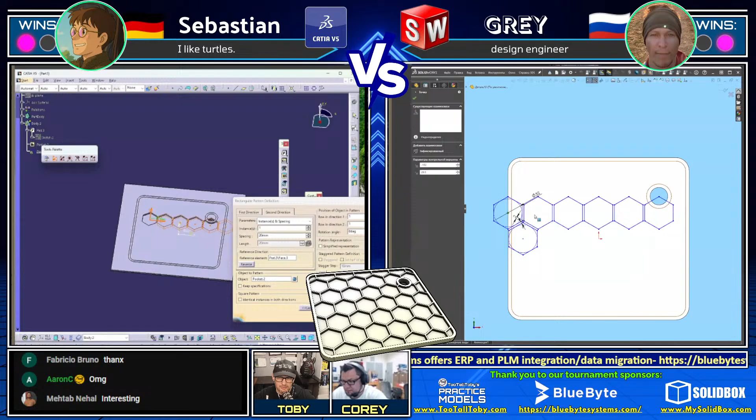And so we see Sebastian here. Interesting approach, looks like he's almost doing a Boolean type approach with those hexes. We've got our wall thickness of 4 millimeters as kind of the default wall thickness, and then we've got our ribs here for the hexes with 2 millimeters.

Well, it looks like Gray's getting tripped up, lost some of his geometry for a second, but he brought it back. So yeah, it comes down to the whole sketch pattern.

Sketch pattern, feature pattern. This is considered a tier 5 model, FPV Kev. Remember, the models are based on, or the tier levels based on complexity, not necessarily difficulty. Difficulty is kind of subjective, where complexity is a little bit easier to measure. So from a complexity point of view, you don't actually need that many features to create this shape. However, from a difficulty level, well, that's a totally different story.

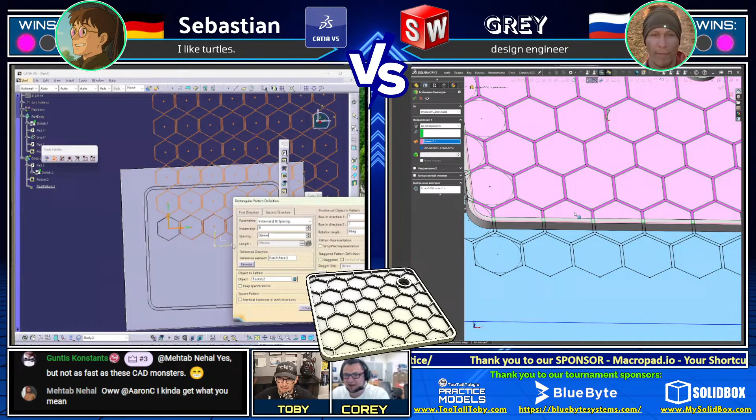And look at Gray getting that pattern in place. Wow, Gray, well done getting that pattern in place. And now you see he's using his dimensions to locate based on where that foundational hex was. But wow, he decided to do it with a sketch pattern. I would not have done that with a sketch pattern, I would totally have done that a different way. But there we go, I am not in this tournament, and Gray is. And look at him getting that hex shape in place. And wow, wow, wow.

Yeah, I think sketch pattern would have been the way I went too. I don't know a different way to do it, that's kind of how I've learned. So I think what we're seeing here on Gray's screen is that he did it with sketch pattern, and now he's maybe running into some issues. SolidWorks is kind of fighting him. I think that's where we tend to run into some issues with sketch pattern, is when we try to get into features, when we have overly complicated sketch patterns.

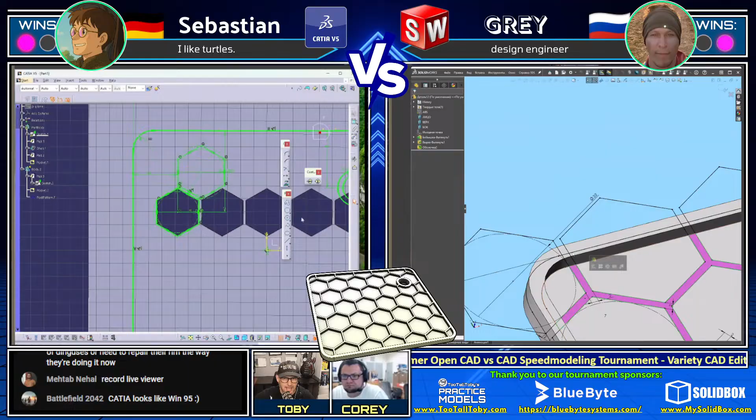We got 191 people watching. I think when people realized that it was this hex pattern, a bunch of people let their friends know to tune in. And wow, wow, wow.

Guys, we might be seeing an answer here coming in from Gray. We're going to watch the chat. We're looking for the answer in xxx.x grams, and Gray comes in with an answer, 180.8 grams. And Corey, we have ourselves a SolidWorks versus SolidWorks final battle. That is correct, Gray, 180.8 is the correct answer.

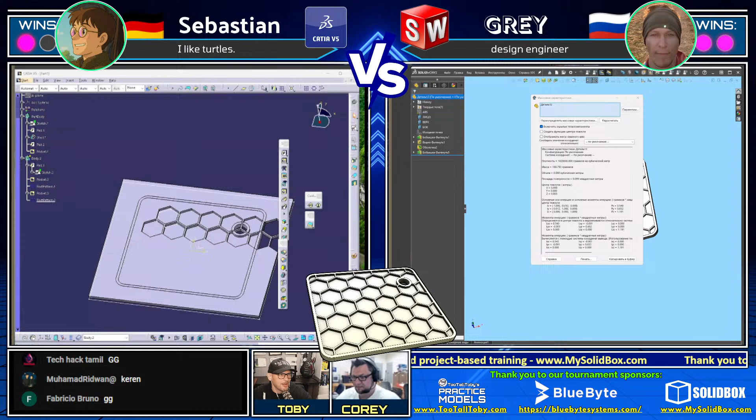And wow, wow, wow, what a comeback. Sebastian won that first match, Gray was able to come back and win the next two. Congratulations to Gray for moving on to the finals. Those were some truly tricky models that the Wheel of Fate delivered there. It was that one little click, just barely going from model number 20 to model number 18. Wow, wow, wow. To be fair, model number 20 was a sheet metal model as well, but I think this one was a lot more exciting to watch.

And wow, what a cool battle, what a cool series of battles. And guys, we got to give it up for our winner of that match. Congratulations to Gray, moving on to the finals of this tournament. Congratulations to both of our runners.

And Aaron C in the chat says, Mehtab, I think now you're going to be under some serious pressure. You got Gray coming up, our number 1 seed versus our number 2 seed in the finals. Are you kidding me? This is going to be an absolutely epic final.